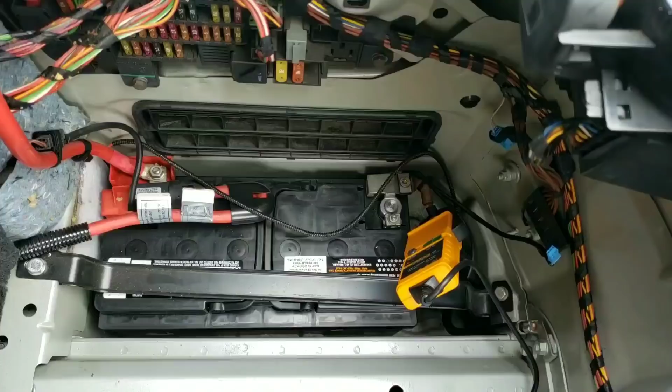Alright, so got called out here on this 2004 BMW 5 Series. I think it's 5 Series. Yeah, it's an E60, so 525i. And had a parasitic draw on this car, but it was an interesting one. And I just want to share it with you guys because it took a little bit of reading and a little bit of information. And I want to show you guys something here.

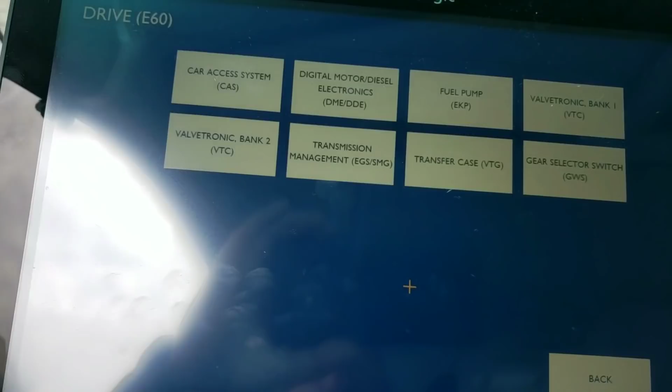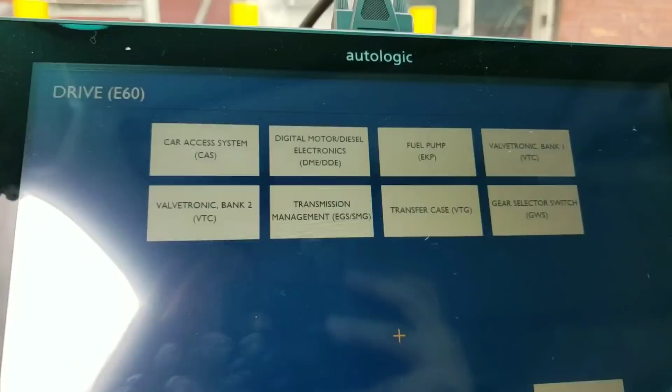Let me see if I can... If I remember where the heck I put the key, we can do it. Let's see. There's the key. Alright. So, got the Autologic out on this one, and I'm going to turn the key on and then off for a second. And now I want to put the key in my hand.

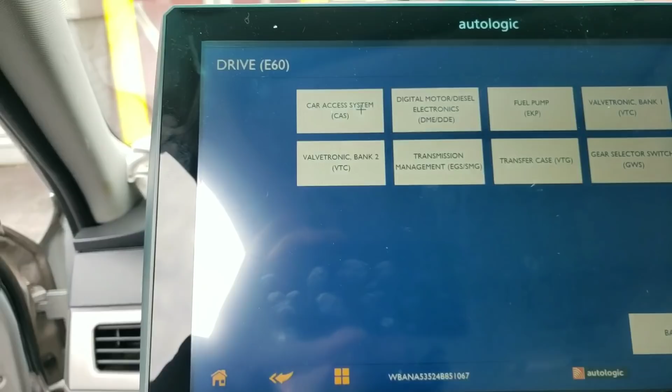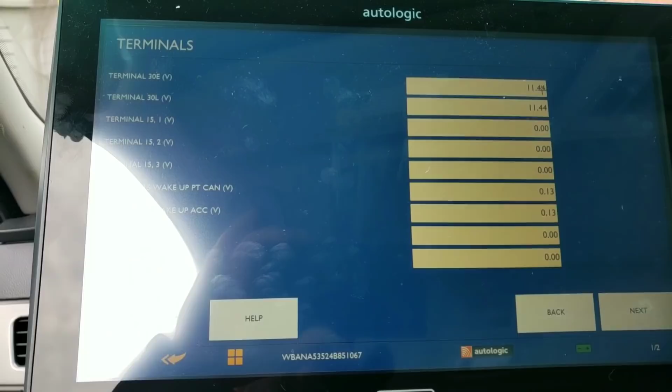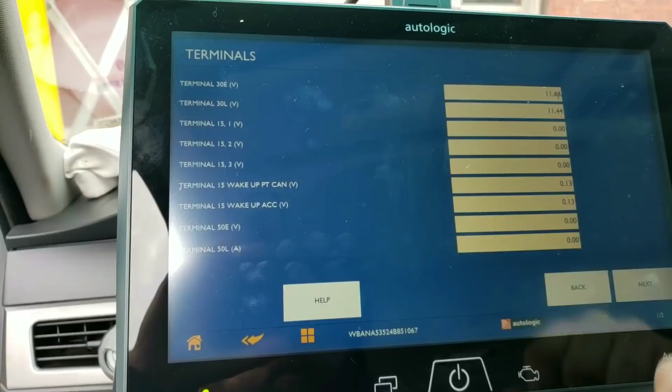What I want you guys to see is in the CAS module, it'll be communicating, and if we go into diagnostic requests, you'll have something in here called the terminals. And the terminals are your voltages that you have coming in there. Now, I'll show you guys what I had. See these two right here? These are the terminal wake-ups. I'm going to try to keep it a little bit off center here so that way we don't have the glare.

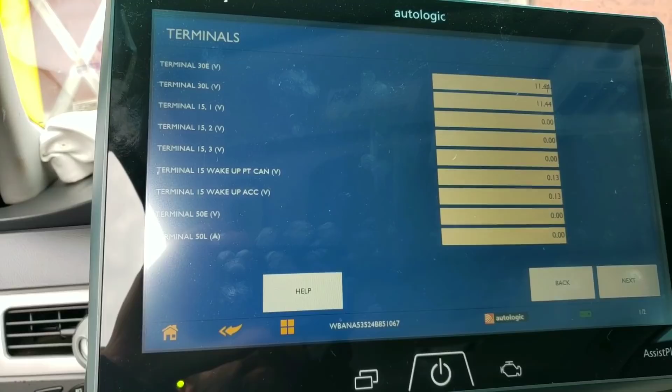But on these two terminal 15s, these wake-ups, these are inputs into the CAS module to turn on those terminal 30s. Now, terminal 30s will stay on for a little while longer, and I did all this reading, by the way, in here under description of energy diagnosis. Lots of information in there. If you're not sure about it, do what I did. I even had to refresh myself on this because I really wasn't 100% sure. So I had to do a lot of reading about what the energy diagnosis is.

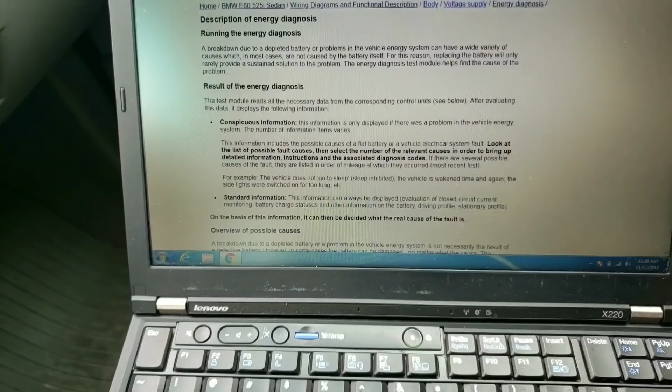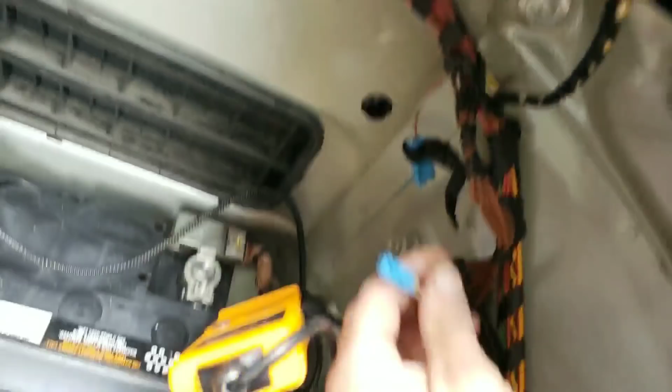But what they did is those terminal 15s would stay active, because we have a bad intelligent battery sensor, which I think if I plug it back in right now, it'll probably do it for you guys. In this case, it's these little wires right here. These go down to the battery cable for an intelligent battery sensor. Maybe we'll do a video to explain what these things are and how they work. Let me just plug that back in and see if it comes back.

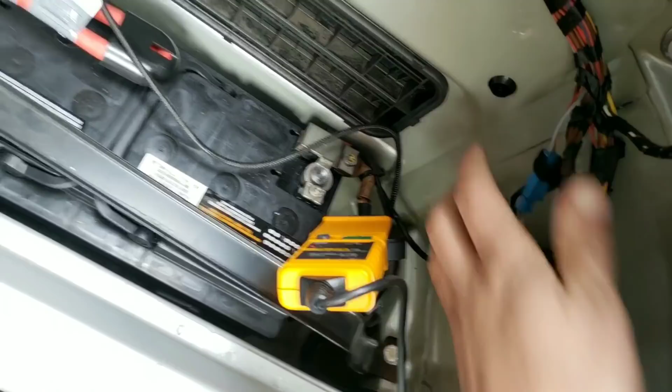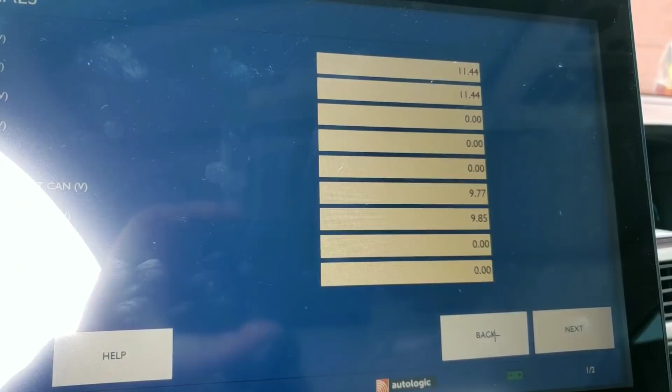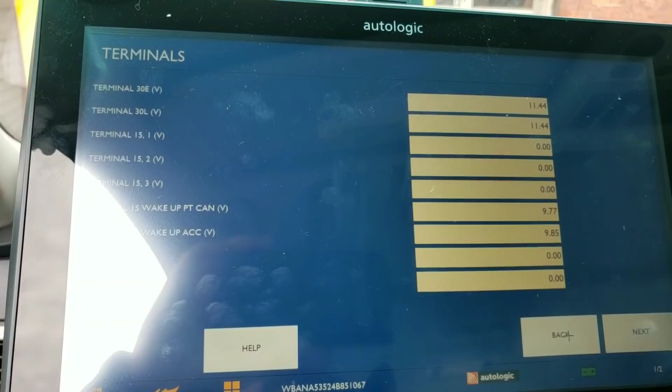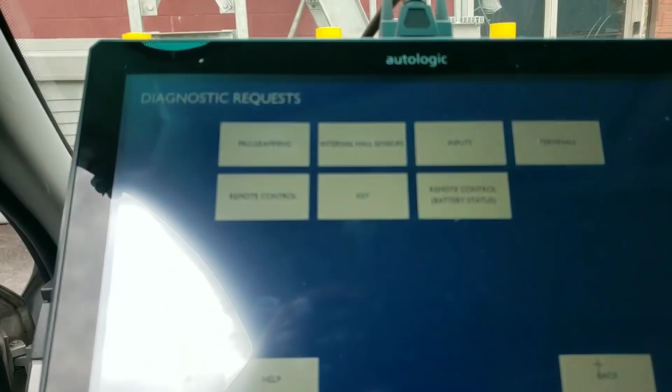Yep, it did. See those voltages? 9.7, 9.8. They should not be there right now. They should not be active. They should not be awake. They should be asleep, and that intelligent battery sensor is going to keep those terminal 15s on for quite some time. And what do you have when you have a terminal 15 on? Well, remember the key's out of the ignition. Let me go back out, and if we go into our DME, it acts just as if the key was on. So essentially that 15 is like having the key on.

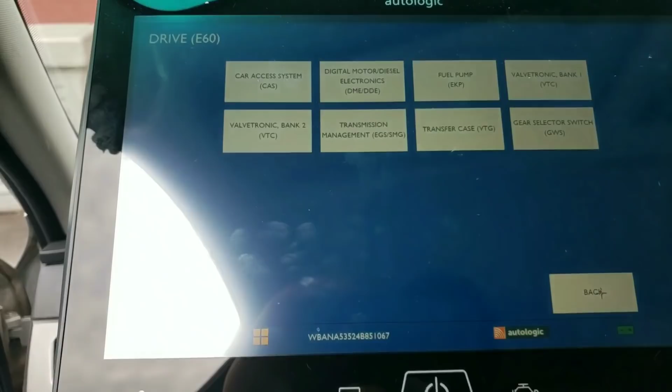Now, not only does it respond that way, but this thing will have about a 7 amp draw right now. If I pop that open, 100 millivolts equals 1 amp. So we're at about 7.8 amp draw, give or take. And mind you, I haven't started this car in quite some time.

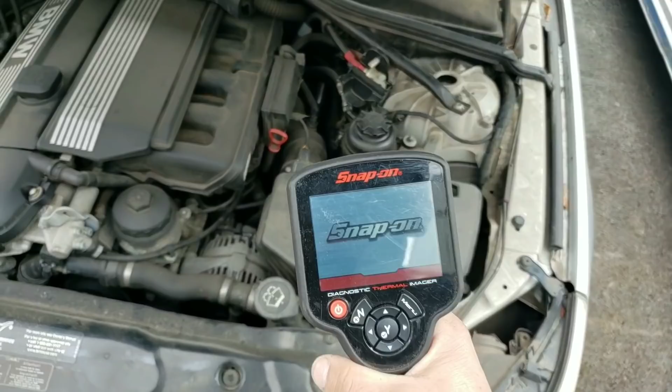So, thermal imager. Pardon me. Trying to get over this cold.

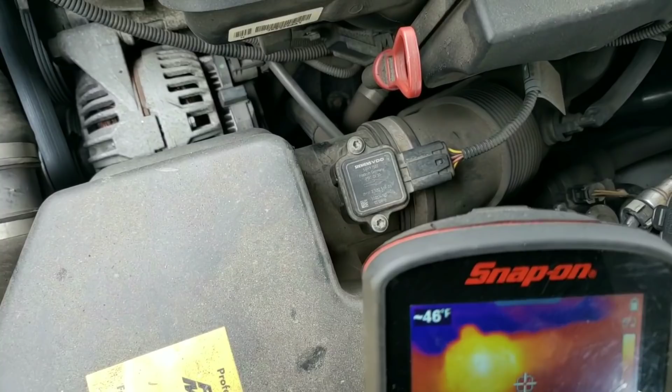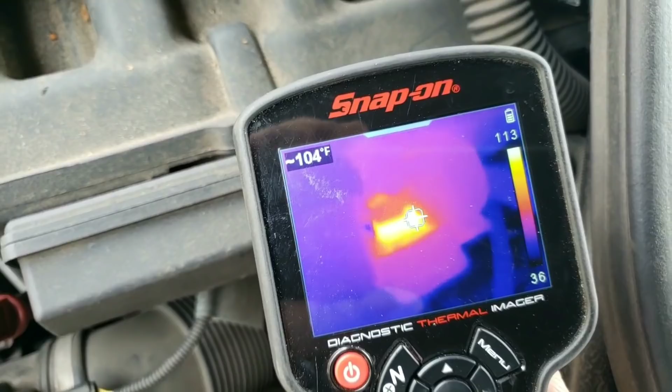Okay, let's let it do its calibration, and if we come out here, we can look. There's our mass air sensor, and it has a heating element inside to keep that element warm, and that's how the mass airflow sensor works. So that's one. The other is the DISA, our intake valve right there. And then down here, what do we have? Our coolant pump.

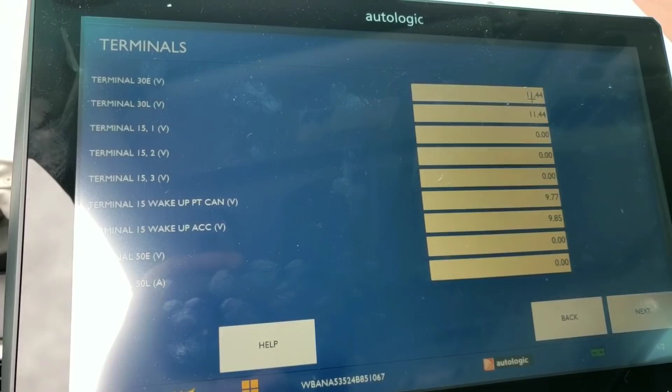So, got a couple things there that stay on, just like the key is on, almost like it's getting ready to start. And all of that is because we have a bad intelligent battery sensor that's turning those terminals on by putting that small voltage on there. It's keeping the CAS awake. If the CAS stays awake, he turns on the terminal 15s because he says, okay, we're ready to turn the ignition on now.

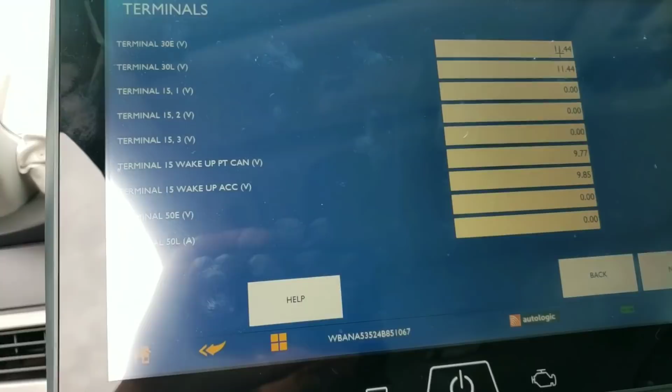And mind you, see all these terminal 15s up here. When we turn the ignition on, and I'll do that for you again, if I stop putting the key in the wrong pocket.

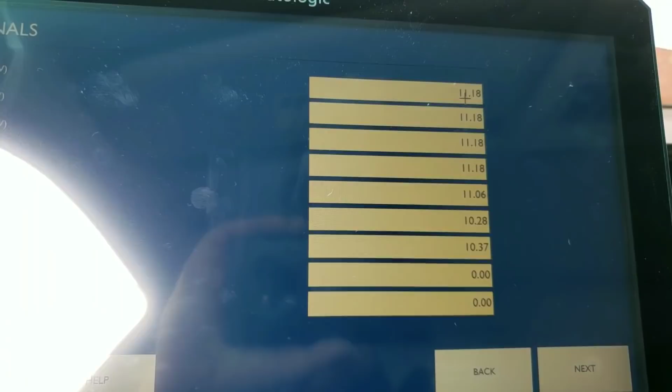If I sit there and I move the terminal forward like this with the ignition, you'll see all of them come on. Notice that that voltage also kicks up there on the intelligent battery sensor, right? Because the CAS is going to be sending out a small voltage to it, and then the intelligent battery sensor apparently will change it. Pretty sure that's how it works. Of course, I'd have to read that as well.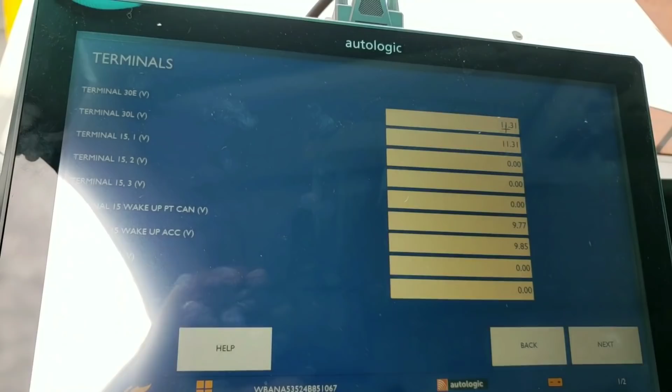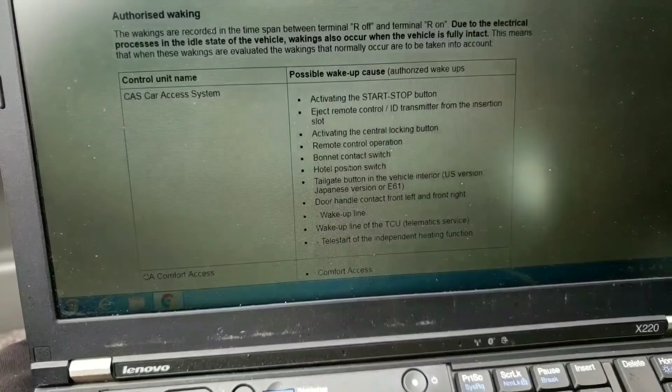But let's get back down here again. And if I go in here for energy diagnosis, I'm pretty sure there's a good description of it in here that I can show you. I think it's on waking up the vehicle. Energy diagnosis, waking up the vehicle. And things that will come in here and turn on. The possible wake-up causes for an authorized wake-up. Mind you, it says authorized wake-up. Activating start-stop button, we don't have that. Eject remote control ID transmitter from the insertion slot.

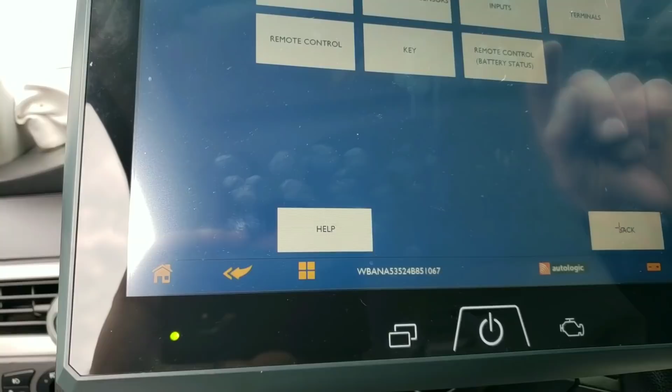Actually, I should bring that to your attention. Don't get fooled at all. And I'm happy that Autologic does it this way. But if I go into, let's see, here's our input list. Our input list is here. Right now it's going to say the bonnet switch is open, obviously because I have the hood open. But when the hood was closed, it does say closed. Your hotel setting, no idea what the heck that is.

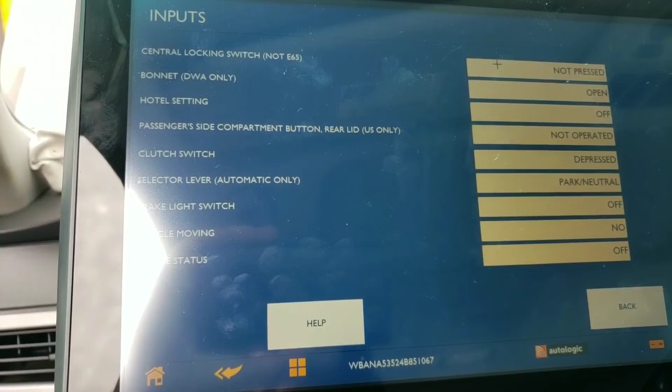The passenger side compartment, and stop ringing.

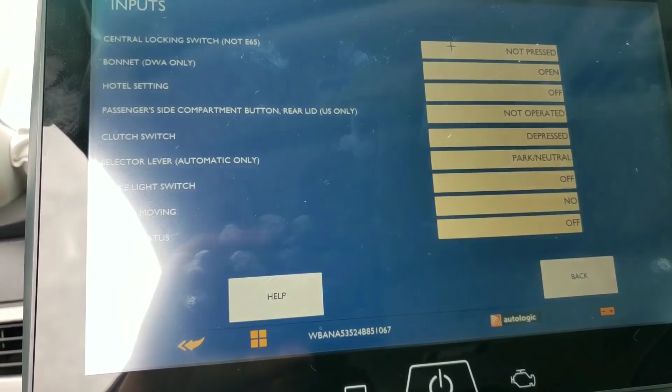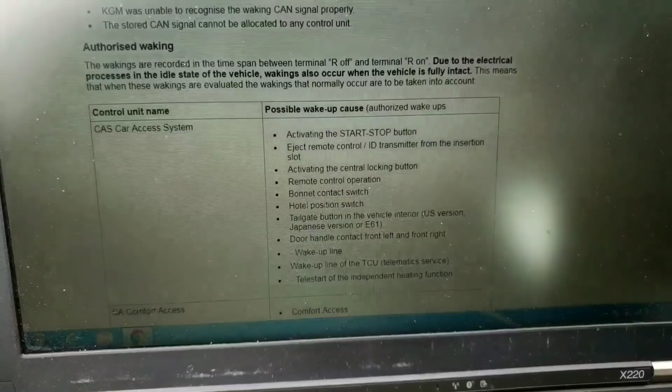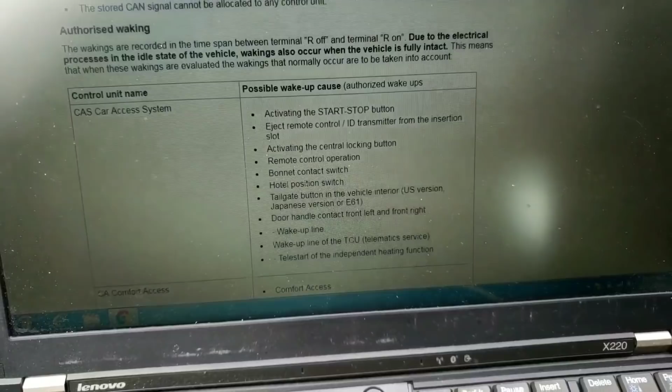Sorry. So brake light switch inputs, all these inputs that are here, everything was no, no, no, and off. So that's what we're looking at. So wake up line of the TCU, the telematics module on this one is there. It does have one, but it does not stay awake. So even when everything else is off, it's not staying awake. Pretty much everything that's on this little list right here. What it doesn't mention there is the intelligent battery sensor. So take note of that.

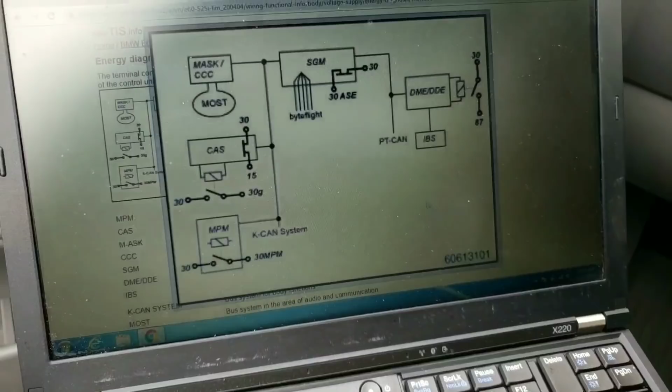And that's where experience kind of came into play. If I went into terminal control and I looked at the overall diagram, here's our intelligent battery sensor here as an input. If he stays awake, he's going to be another wake-up signal into the DME, into the CAS. Everybody here is going to be on that line and saying, hey, okay, so we're still awake. Let's see, they call it a micro power module. There's our intelligent battery sensor.

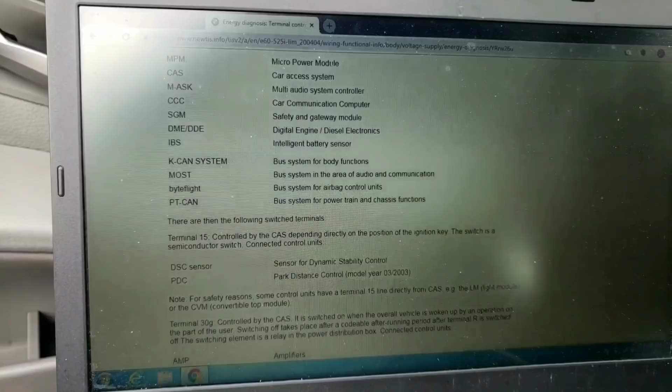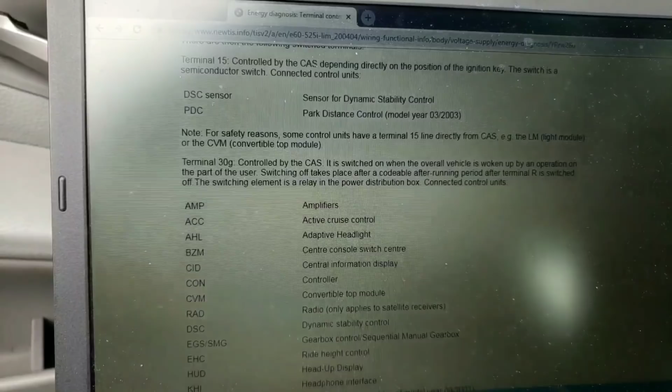There are the switched on terminals. Terminal 15 is controlled by the CAS depending directly upon the position of the ignition key. That's the terminal 15. Notice it's saying 15 and not our wake up 15. See if it mentions the wake up signals in here, and it does not. Doesn't even mention our wake up signals. So if we come back out, oops, I went a little bit too far there, and we want to go function description for the intelligent battery sensor.

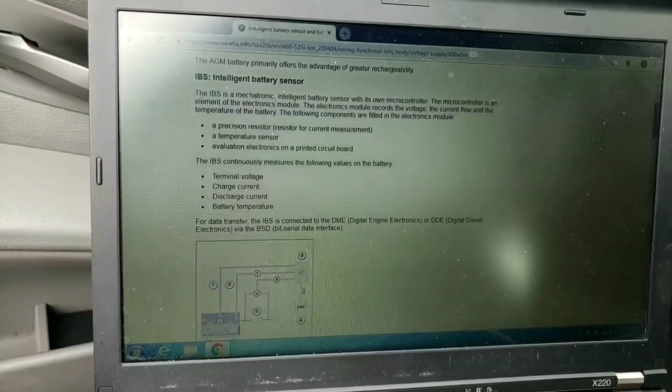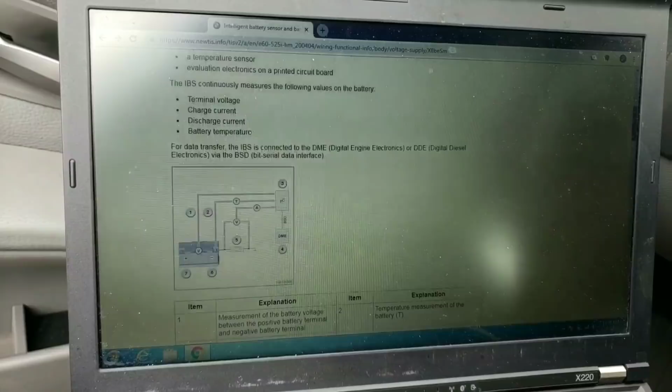IBS is a mechatronic intelligent battery sensor with its own microcontroller. It continuously measures the following values on a battery: terminal voltage, charge current, discharge current, battery temperature. That's great, but it has to be with the key on, not with the key off. Let's see if they say anything good here. Just gives us a histogram, lets us see our energy diagnosis, our startability limit, and our overall battery condition, which in this case here the battery is low, but we did have it on earlier.

Excuse me again. Notice, register battery replacement. After installing a new battery, I know somebody was asking that question the other day, the battery replacement has to be registered to tell the power management system that the new battery has been installed to the vehicle. If the battery replacement is not registered, the power management function will not function properly. Man, I can't read this through the viewfinder. Anyhow, it's all right there in front of you. So,

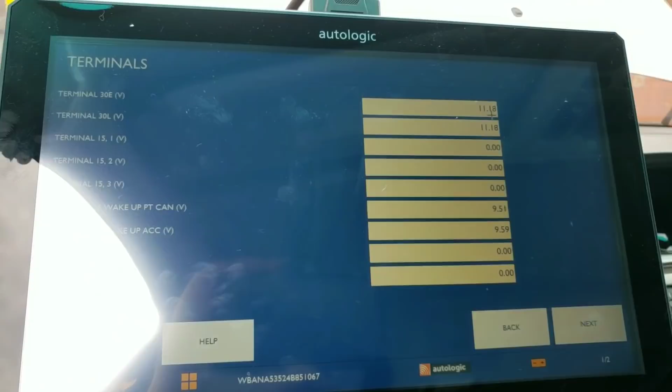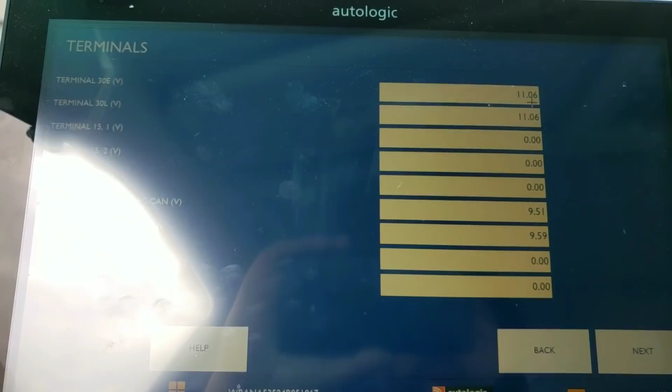if we look in here, again, we have our inputs. Oh, I'm sorry, terminals. And I'm going to go back there again, unplug that IBS so we can kill that draw. And what it'll take is about 20 minutes after you disconnect it. Seems to be the number on this car. It took about 20 minutes after I removed our intelligent battery sensor for these numbers here, the 30s, to drop out. And at that point, you have no communication to CAS with the key out of the ignition. You have no communication with the DME either.

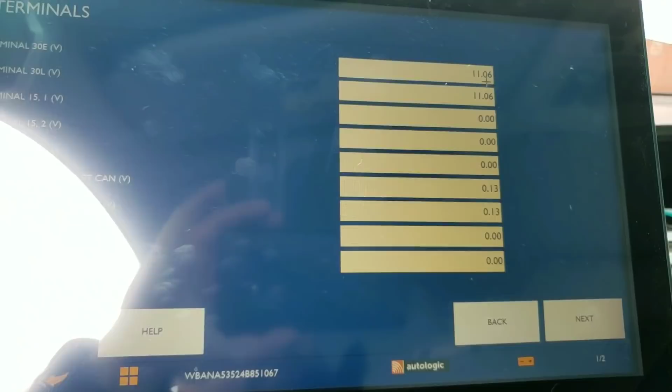So I think that's pretty much all I'm going to get into on this one. But European cars, without a doubt, there are differences. They just work differently. So there you are. With it removed, we still have 0.13 volts on there, which I think is okay. I think that's just circuit monitoring, because that CAS is still awake right now, because we're in it.

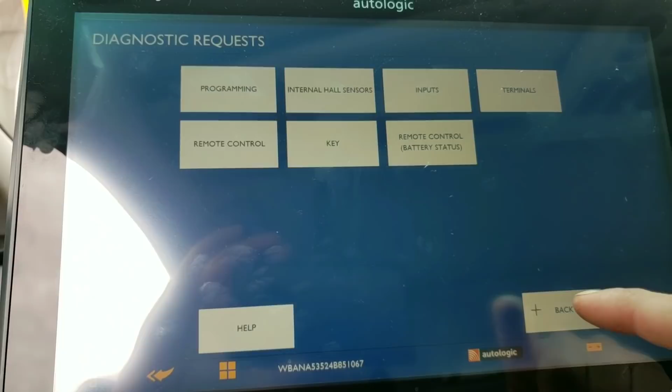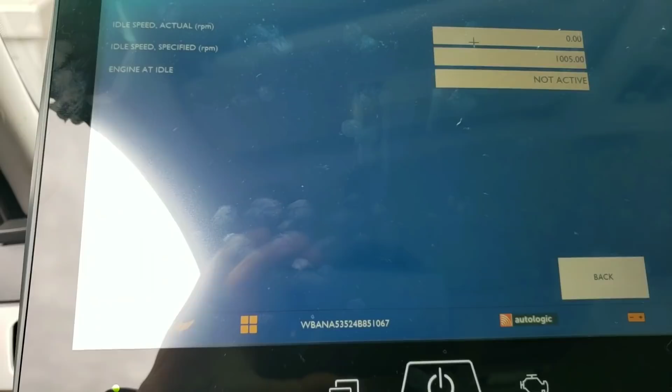And like I said, in about 20 minutes from now, if I was to come back on here again and we tried to get into any one of these modules, DME or CAS, we would have nothing. All of this would drop out. Matter of fact, you'll actually hear the chime inside here, almost as if you had just removed the key from the ignition, which probably is not going to happen while we're waiting. But anyhow, that's all. Just wanted to bring this to your attention.